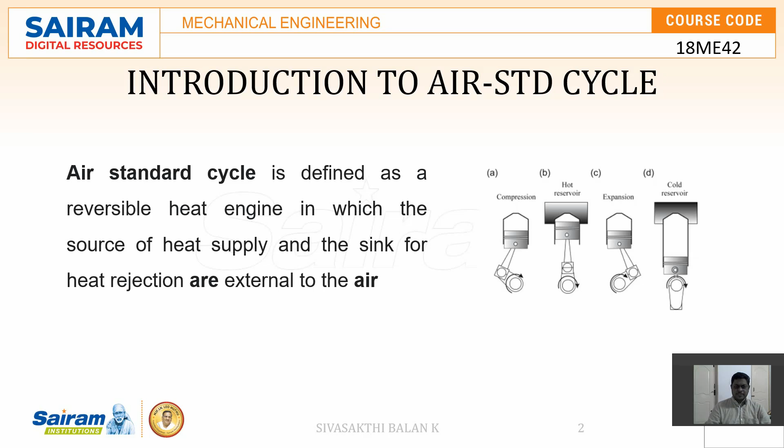Air standard cycle is a thermodynamic cycle where a system undergoes various processes and comes back to the initial state where it started. When you use air as the working medium in this thermodynamic cycle, it is called an air standard cycle. And we need to assume certain things in air standard cycle.

The main assumptions are that the working medium we are using in the air standard cycle is a perfect gas, particularly air, there is no chemical reaction during this cycle, and all the processes are reversible. We also need to assume that there is no heat transfer between the system and the surrounding. That means whatever heat is supplied into the system is completely converted into useful work. In other words, it should produce a 100% efficient engine. Is it possible?

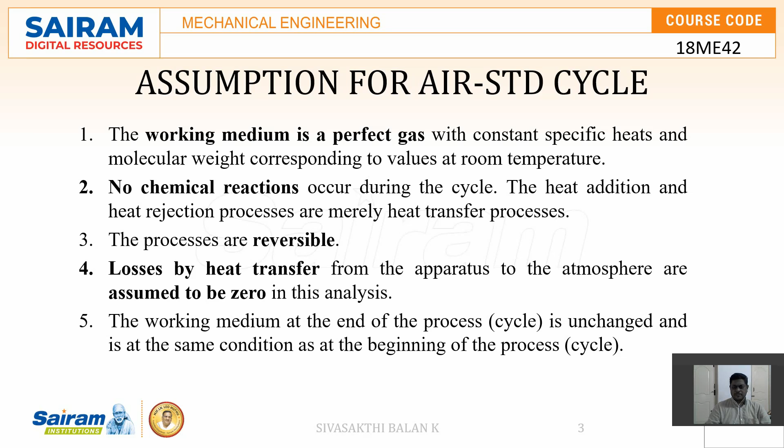Definitely not. There is a reason we call this an ideal cycle, and we keep these cycles as a reference to compare with the actual cycles. Now, let us see how the Carnot cycle works and how the Carnot cycle efficiency is derived.

Carnot cycle occurs with 4 processes. It has 2 isothermal processes and 2 adiabatic processes. The main thing we need to note here is that heat addition takes place during expansion when the temperature remains constant, and heat rejection also takes place when the temperature remains constant. Moreover, all the processes are reversible. Since it is a reversible process, every reversible adiabatic process is known as an isentropic process. That means entropy remains constant.

When you observe the temperature-entropy diagram, you can see the process 1 to 2 is where the entropy remains constant. This is a reversible isentropic process, a reversible adiabatic process. And here the temperature remains constant, and we are adding heat. We call this the maximum temperature, and where heat is rejected to the sink is called the lower temperature.

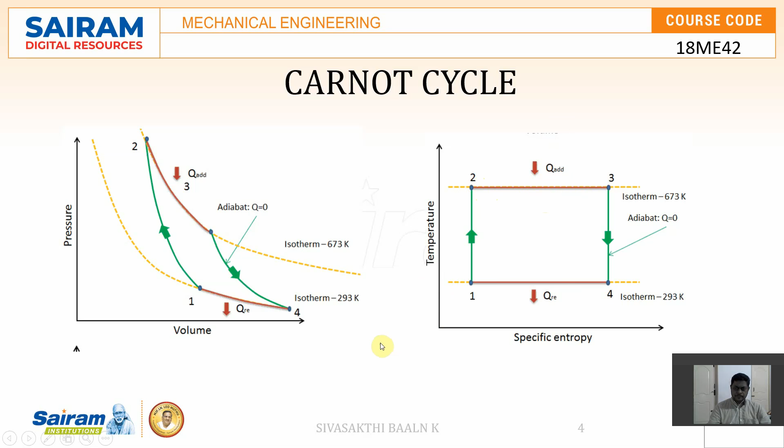The working and efficiency of the Carnot cycle can be clearly explained in this video. Do observe this video. It will give clarity about the Carnot cycle efficiency calculation. Let's watch these videos first. Two diagrams: one is the pressure versus volume, and the second diagram is the temperature versus entropy.

So this is the engine cylinder, and this is one end of the engine cylinder, and inside the engine cylinder this is the piston. The piston will reciprocate inside this engine cylinder, and this is the insulator that is initially covered at the end of the engine cylinder. This is the heat source having temperature T1, and this is the heat sink having temperature T2, and obviously you know that T1 is greater than T2.

So initially the insulator is uncovered at the end of the engine cylinder, so that heat will be supplied from the heat source to the working fluid, or you can say working substance, that is available over here. Generally for the Carnot cycle, it is air, and that air is a perfect gas. Due to the application of heat from the heat source, the air will expand, and so the piston will move from left to right, and that movement is called the initial stroke.

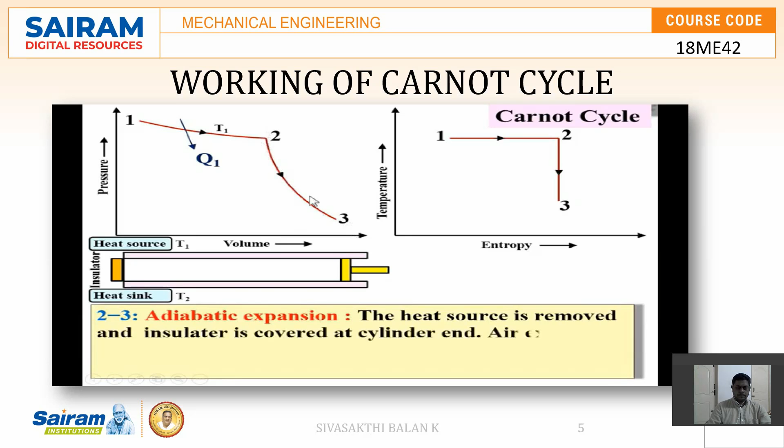Now that heat supply is removed and the cylinder is covered with the insulator. Now again the piston will move from left to right, and that stroke or process is represented by 2-3 on the PV diagram, and here it is also 2-3 on the TS diagram. The process 2-3 is called the adiabatic expansion. Here you can see the volume is increased, so it is expansion, and during that process entropy remains constant, so it is called the adiabatic process.

So during an adiabatic process entropy is always constant. The heat source is removed over here, and the insulator is covered at the cylinder end. Air expands with a reversible adiabatic process. So during the reversible adiabatic process volume is increased from V2 to V3, and you know that during an adiabatic process no heat is transferred.

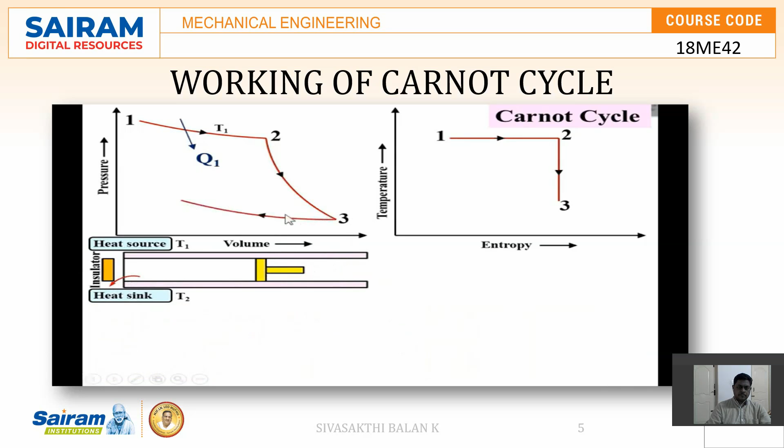Now this insulator is once again uncovered, and the piston will move from right to left, and during that, heat is rejected from the working fluid to the heat sink. And this process on the PV diagram is like this, on the TS diagram is like this. 3-4 is called the isothermal compression. Isothermal means, as you can see over here, constant temperature. Compression, so the volume is decreased from V3 to V4.

So the insulating cover is removed, the heat sink is connected with the cylinder end, and air is compressed at constant temperature, and hence volume is reduced from V3 to V4. So that is at constant temperature T2, and during this process the heat is rejected from the working fluid to the heat sink. Let's say it is Q2.

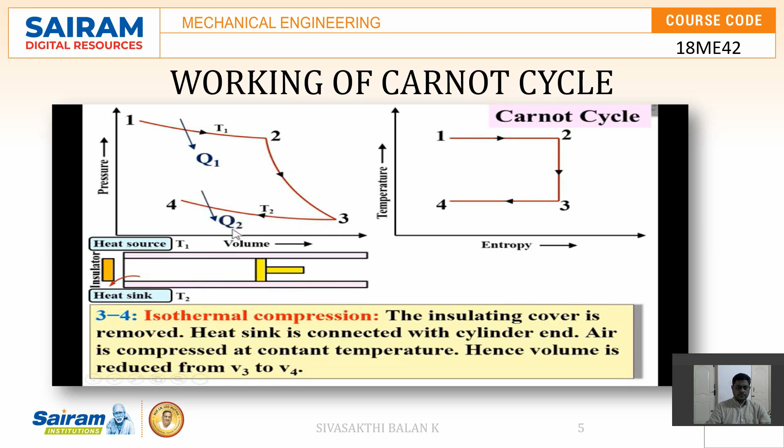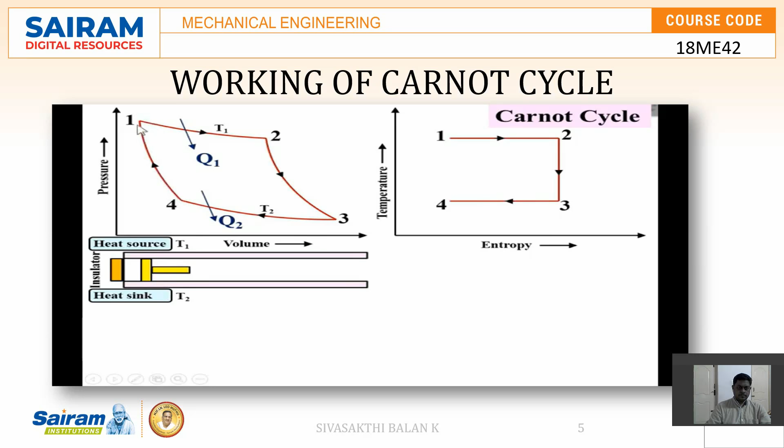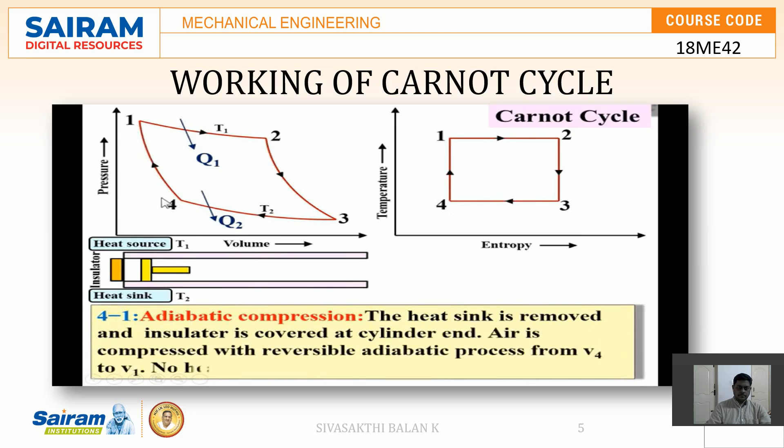Now next, once again the insulator is covered, so that no heat will be transferred. The piston will move again from right to left, that means to the initial position of the piston at state 1. So that process is represented by 4-1 on the PV diagram and on the TS diagram. So 4-1 is the adiabatic compression. Here you can see the volume is decreased, that's why it is compression. During that, entropy is constant, that's why it is called the adiabatic process.

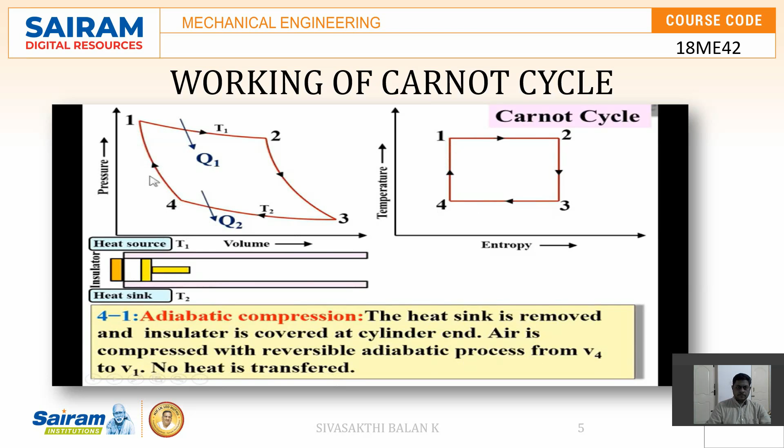So the heat sink is removed and the insulator is covered at the cylinder end. Air is compressed with a reversible adiabatic process. So in the reversible adiabatic process, entropy is always constant, and here you can see the volume is decreased from V4 to V1, and always during an adiabatic process no heat is transferred.

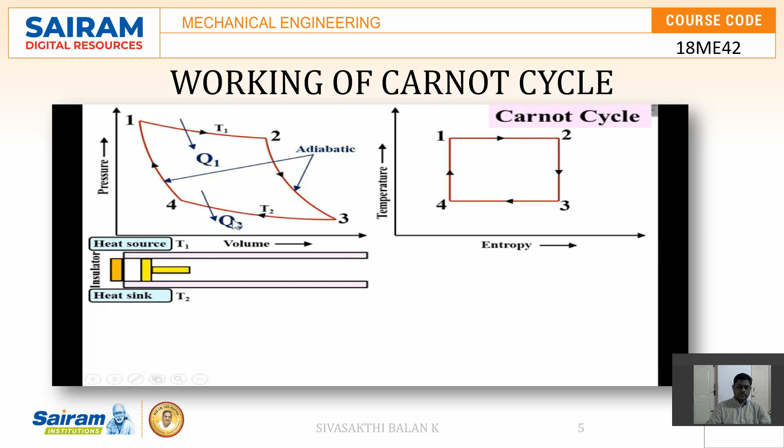So here I can say these two processes are adiabatic processes, and during an adiabatic process entropy is constant and no heat is transferred. And these two processes are isothermal processes, and during an isothermal process heat is transferred. So this is the summary that we have discussed for processes 1-2, 2-3, 3-4 and 4-1.

Now, efficiency of the Carnot cycle. As we have discussed these two diagrams, PV and TS diagram, now during process 1-2, heat is supplied and that is exactly equal to the work done by air. So I can write over here Q1 equals W12. That means whatever heat is supplied is converted into work done, because it is an isothermal process. And as you know, according to the first law of thermodynamics, heat supplied is completely converted into work done during an isothermal process. So this is the heat supplied Q1 and this is the work done during process 1-2.

And you know that for the isothermal process it is equal to P1 V1 ln V2 by V1, and that V2 by V1 is called the expansion ratio. So I can say P1 V1 is equal to mRT1 as the characteristic gas equation, and V2 by V1 is the expansion ratio R. Let's say it is equation number 1.

Now during the process 3, 4, heat is rejected, and that is once again at constant temperature, so that heat is exactly equal to work done. But here this heat is rejected, and that's why the work done is on the air. Over there the work is done by the air, because it is the heat supplied, so it is plus sign. Over here it is rejected, so it has a minus sign. So I can say it is minus work done during the process 3, 4.

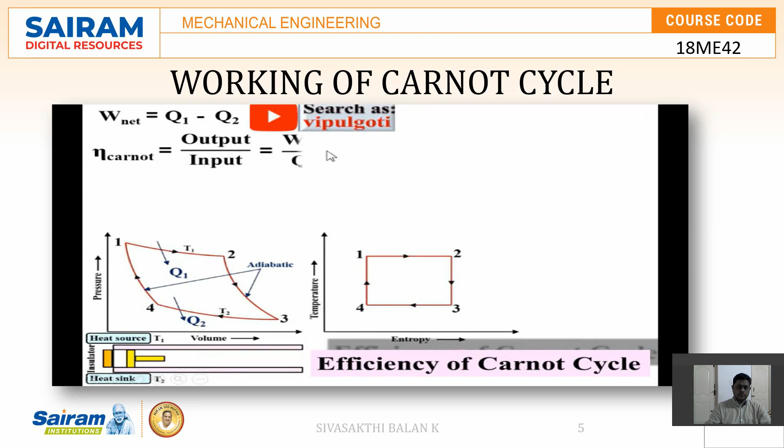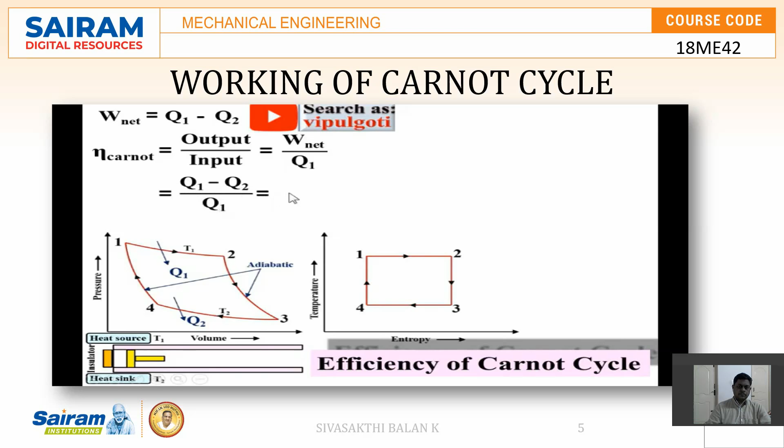This is my next page and this one is the earlier page. So W net is equal to Q1 minus Q2. That means the net work done during the Carnot cycle. And you know that the efficiency of the Carnot cycle is equal to output upon input. And here the output is the net work done, that is Q1 minus Q2. And input, you can see from the cycle, your input is Q1. So W net is equal to Q1 minus Q2, and I can put it over here upon Q1 as it is. So if I simplify further, it is Q1 by Q1 minus Q2 by Q1, and so it is 1 minus Q2 by Q1. So let's say it is equation number 3.

Now this is my earlier page. So the efficiency of the Carnot cycle is equal to 1 minus Q2, and Q2 is equal to mRT2 ln R, upon Q1, and Q1 we have already derived, mRT1 ln R. So here mR will be cancelled, ln R will be cancelled, so that your remaining term for the efficiency of the Carnot cycle is equal to 1 minus T2 by T1, and that is the efficiency of the Carnot cycle. Let's say it is equation number 4.

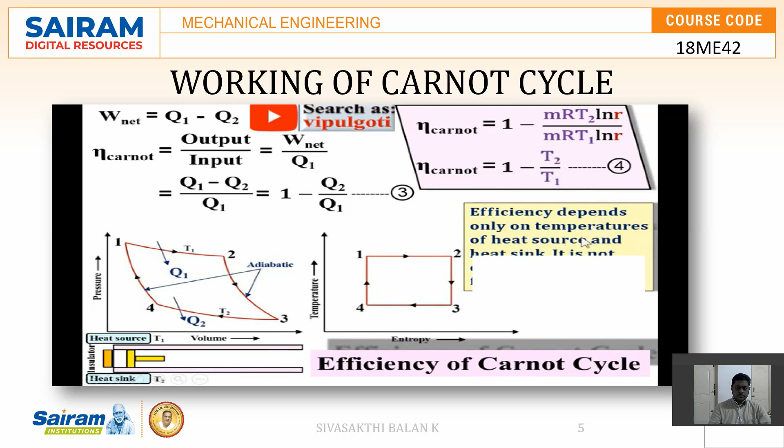So from this equation number 4 you can conclude that the efficiency of the Carnot cycle depends only on the temperatures T2 and T1. That means the temperatures of the heat source and heat sink only. It does not depend on the working fluid.

To summarize this, the derivation of the Carnot cycle is as simple as explained in the previous video, and it's easy for us to understand as well. And the main point which we need to recollect at this point is that there are 4 processes happening in this Carnot cycle. 2 are isothermal processes and 2 are adiabatic processes, and all these 4 processes are reversible, since we assume them as ideal processes. And a reversible adiabatic process is also known as an isentropic process. And the efficiency of the Carnot cycle depends completely upon the lower temperature as well as the higher temperature. It doesn't depend upon any working medium.